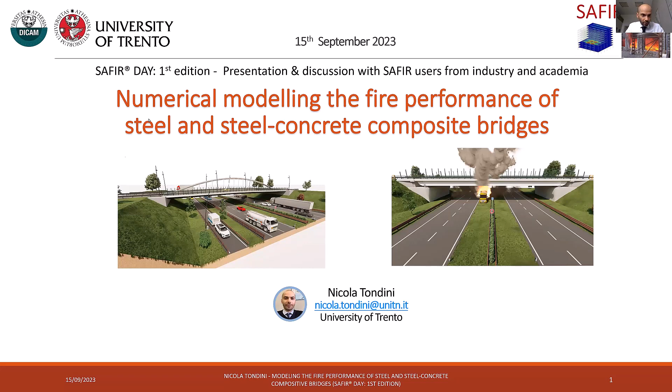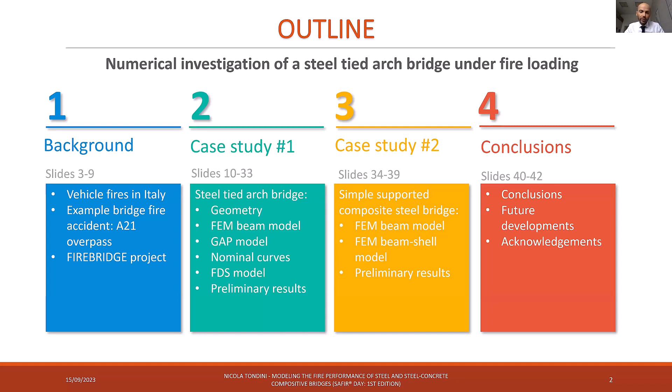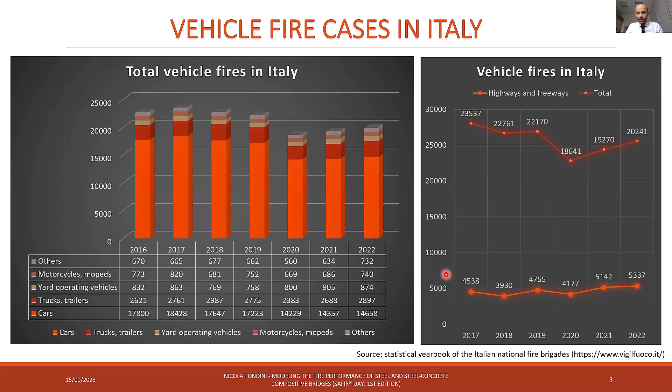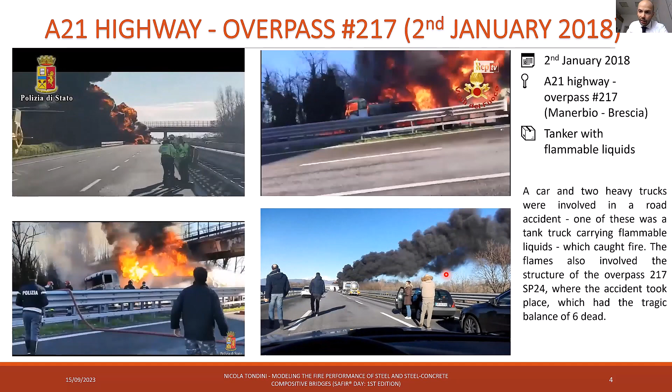Here is an example of this - a fire that occurred in Italy in 2018. There was a road accident underneath a concrete bridge, not very far from Milan. A tanker with flammable liquids ignited, and this is what happened just underneath this overpass on the other motorway.

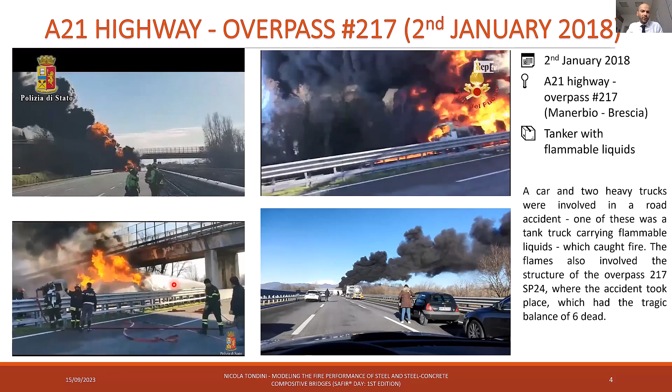So the consequences of this accident were that, after the tests, it was found out that the bridge was not able to withstand the loads anymore, so it was not safe. There was a demolition and also a rebuilding of the bridge. After more than one year, there was a new opening of the overpass.

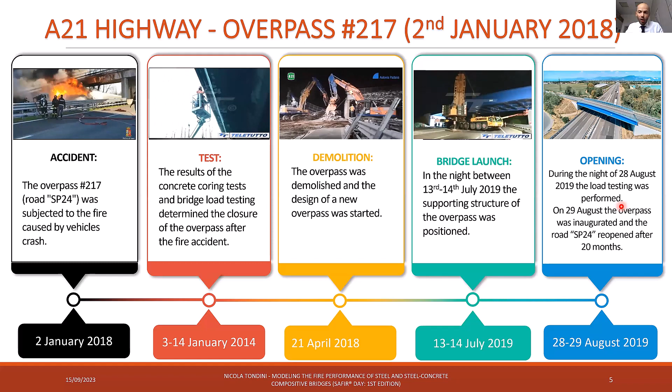So this entailed a lot of consequences. First of all, the temporary closure of the infrastructure, longer travel times for people living nearby, loss of revenues of the highways because of the closed road needed to put that part of the highway into safety, and decrease of business revenues with possible company closures.

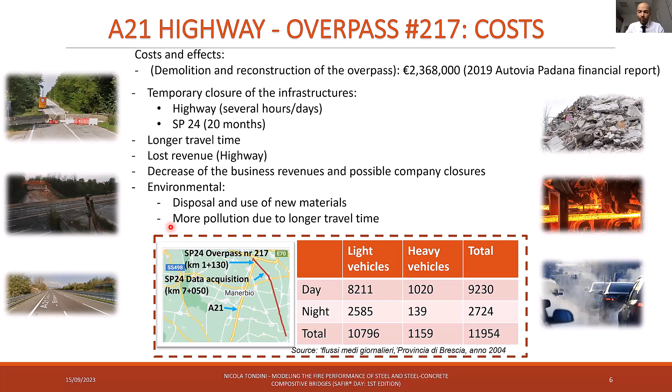We didn't estimate this, but at the environmental level a new bridge had to be rebuilt, and also more pollution occurred due to longer travel times, since there was no shortcut anymore for people commuting to work. This is just one example - there are many examples in the literature. There was also a large fire in the United States at the end of June of this year.

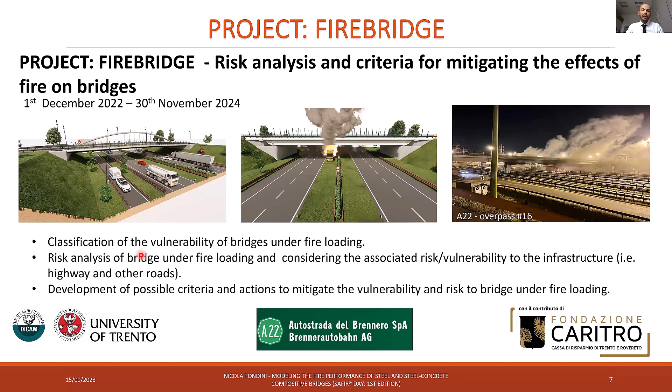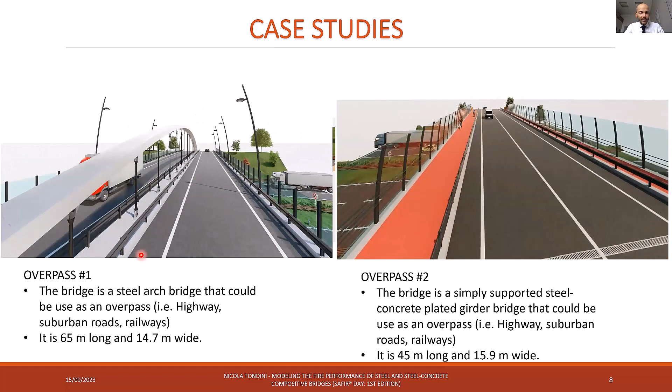So let's go into the modeling of a couple of case studies that can represent overpasses of a highway. The first one on the left is a steel-tied arch bridge, and on the right is a plated girder bridge. The first one is 65 meters long and almost 15 meters wide, whereas the other one is 45 meters long and 16 meters wide.

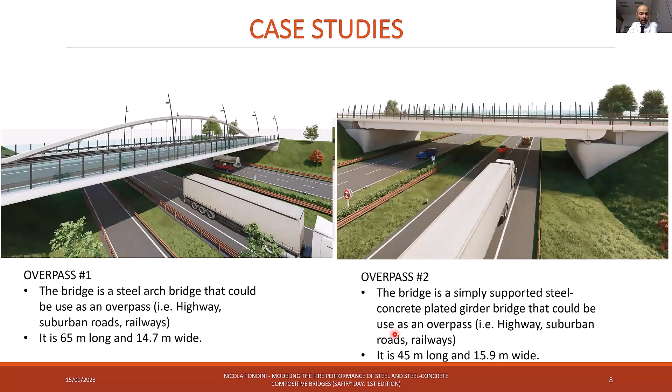Now some characteristics about the cross section. Basically this steel-tied arch bridge has an orthotropic steel deck, so the concrete slab did not participate in the structural section or the stability of the bridge - we consider it only as a weight.

The properties of the steel grade were S355, and the hangers were made of a high strength steel, 750 megapascal. There were two traffic lanes, and the arch is in the middle, as you can see, between the two lanes.

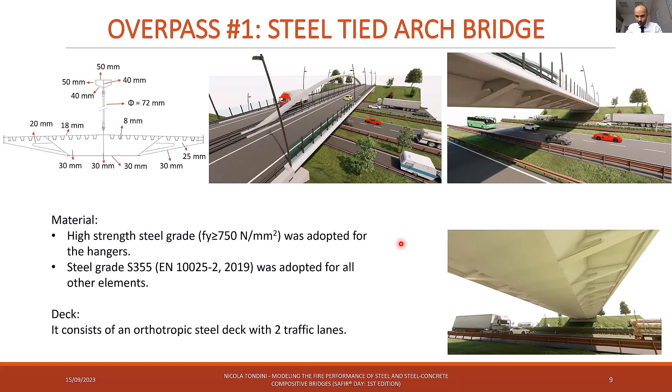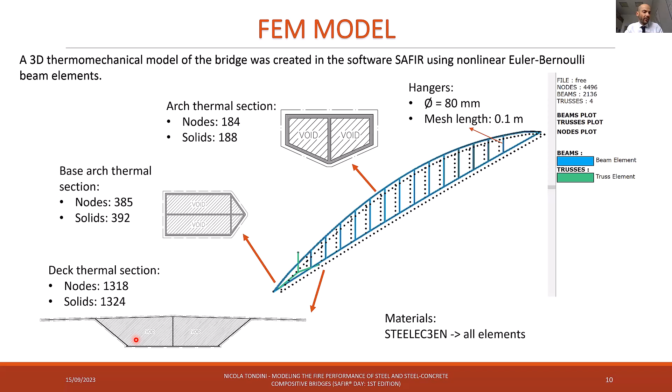Here is the first modeling that we performed in SAFIR - the structural model was by means of beam finite elements, with Euler-Bernoulli beam elements. These are the cross sections, for example of the arch, with the void, and also the orthotropic deck section that was simplified, including some ribs and stiffeners in a simplified way. The cavity is very important in this case, especially if the fire is underneath the bridge.

The load combination we used is self-weight of the structure, permanent loads, and indirect effects due to thermal expansion. The joints accommodate normal seasonal temperature variation over the year, and the expansion joint can also close and create indirect actions. We didn't consider variable loads, assuming that when fire was underneath the bridge, no cars were on the deck.

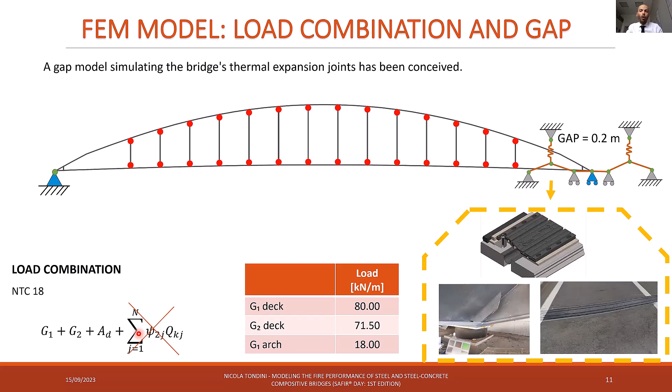Interesting is what we applied to model the effect of the expansion joint. The thermal expansion void was 20 centimeters wide, and we created a particular structure into SAFIR in order to reproduce more realistic boundary conditions, since typically in the literature you find boundary conditions that are simply supported or hinged.

In this case, what we developed, with elements within SAFIR, is a small structure able to reproduce the effect of the expansion joint, and above all, when the expansion of the bridge is such that this thermal expansion joint is closed, it creates some indirect action. There are truss elements with stiffness much higher than the stiffness of the deck, and we put a spring with really small stiffness, mainly for convergence reasons.

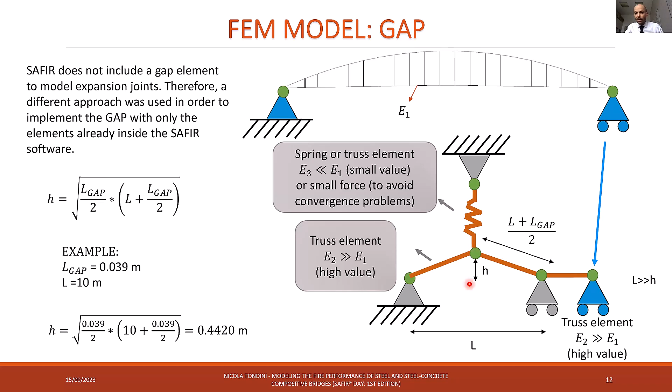This can move, and as soon as these truss elements are on the same line, there is an axial force different from zero. This works in two directions, because if we apply a fire scenario with heating and cooling, the thermal joint can close, but then can also reopen.

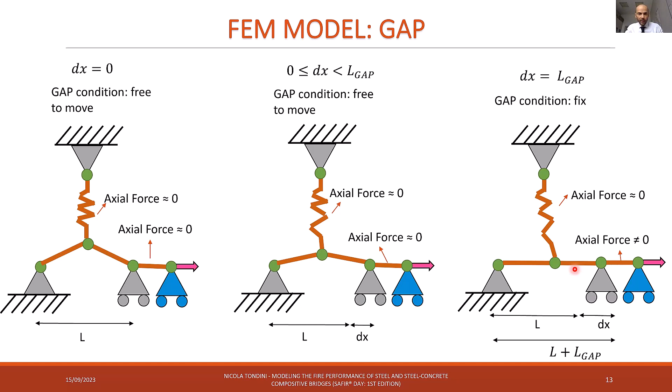Here there is a validation of these gap elements with respect to OpenSees software. You may be familiar with OpenSees, since you can also model multi-hazard analysis between, for example, fire and seismic. Here the comparison is really good.

So here there is the horizontal displacement when this gap is closed. You can see that there is no displacement anymore, but then there is an increase of the forces inside the structure.

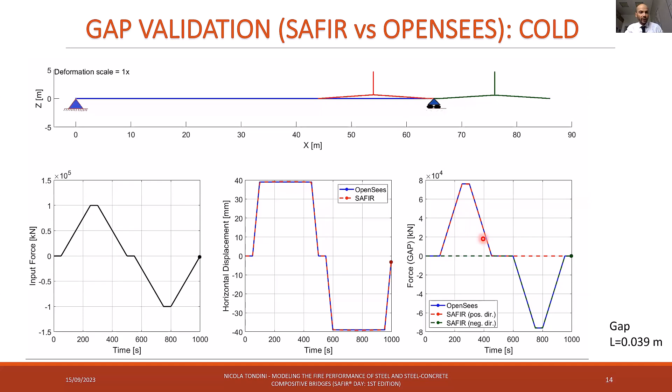The nominal curves that we used in our analysis were different. The two that can be more relevant to this case is the hydrocarbon curve, but also the Stoddard curve, which was derived from an actual accident that happened more than 20 years ago in a railway accident. You can see there is some heating, then a part with a plateau, and then a cooling phase.

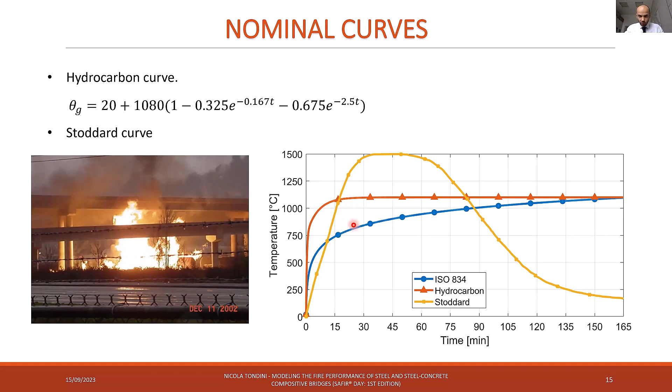You may notice here the comparison with the hydrocarbon curve and the Stoddard curve. There is a lower thermal gradient at the beginning, but then higher temperatures.

Here there are the different fire scenarios when the fire is underneath the bridge, for example when a road accident occurs in the motorway. We considered some full heating, which is unlikely -- the total 65 meters is not very likely to occur.

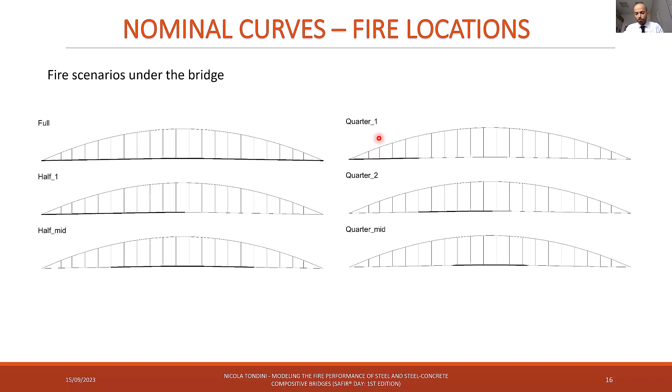It could be more localized, so we considered half of the bridge, also moved from the left middle side to the center, and we also considered quarters in order to be more localized and probably more realistic in terms of the fire scenario.

Here there are some animations. The results are from SAFIR, but we developed routines in MATLAB in order to produce animations and improve the representation of what happened in the structure.

So here you can see the horizontal displacement of the deck. This is under the scenario of the Stoddard curve when it is applied in the middle quarter. You can see that the gap is closed.

If I start the simulation again, you can see that in the tied arch there is tension in the deck, but as soon as there is closure of the thermal expansion joint, you might have compression because of the indirect actions. Here, there was a collapse of the bridge after 40 minutes.

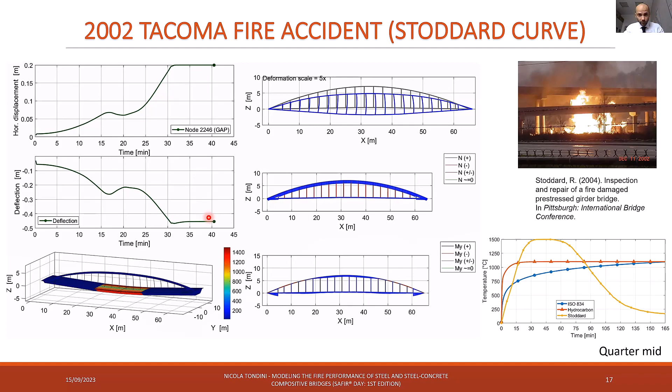Here you can see the evolution of the horizontal displacement for the fire scenarios. Of course, when there is full heating underneath the bridge, the increase of horizontal displacement is higher.

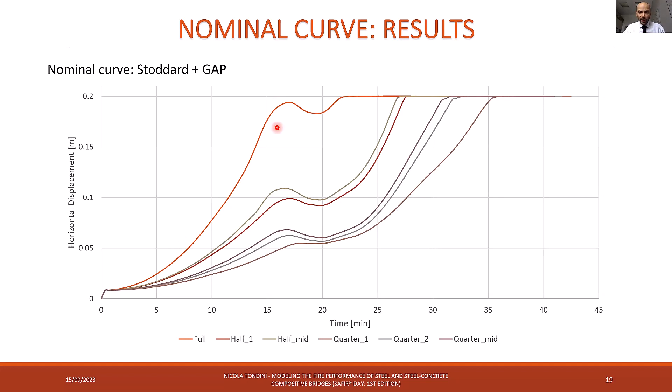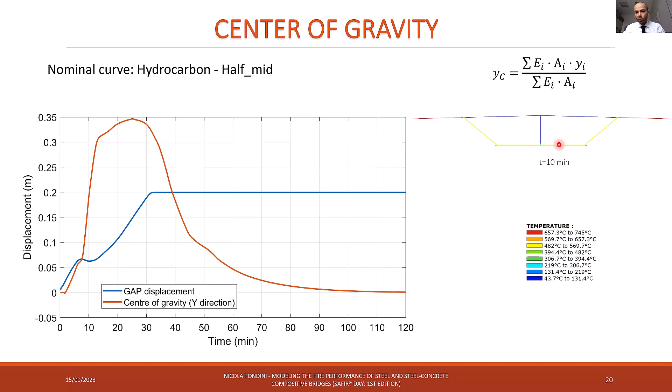Here you can see some waves, because since the heating of the bridge is not uniform, the center of gravity of the bridge moves towards the colder parts, and the resultant of the axial load in the deck is always applied at that point in the node line, so we might have some eccentricities. This is the reason why you have some waves. Here are the representations of the results for the different fire scenarios.

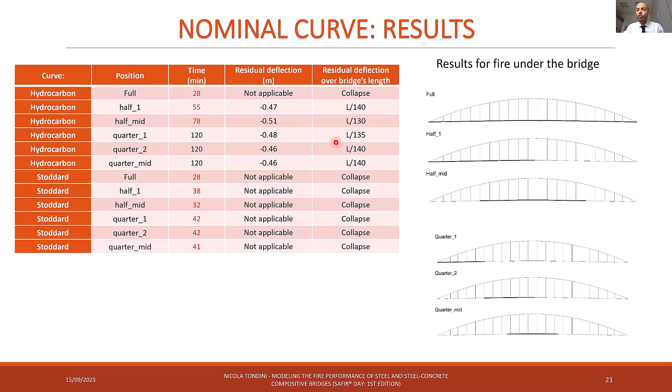Above all, for the Stoddard curve, there was always collapse, whereas by applying the hydrocarbon curve, the collapse didn't occur, and then there was some residual deflection that also has to be quantified in order to judge if the bridge can be functional or not.

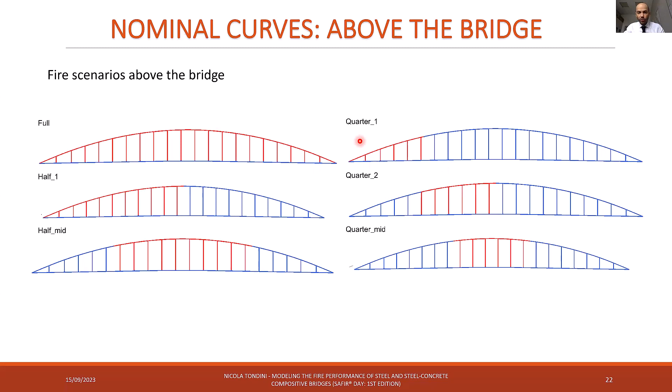Here there are some scenarios above the bridge, because of course the arch is a load-bearing member, and here there are some fire scenarios with the full arch and the hangers that are heated, or just quarters and the position. Here, for example, I think this is the simulation.

Here, the problem, we introduced also some imperfections in the hangers, and the problem was the loss of bearing capacity of the hangers because of their slenderness, that could not support the bridge with the arch.

And so this is the reason why for all the fire scenarios that we simulated with the nominal curves, we found that there was collapse.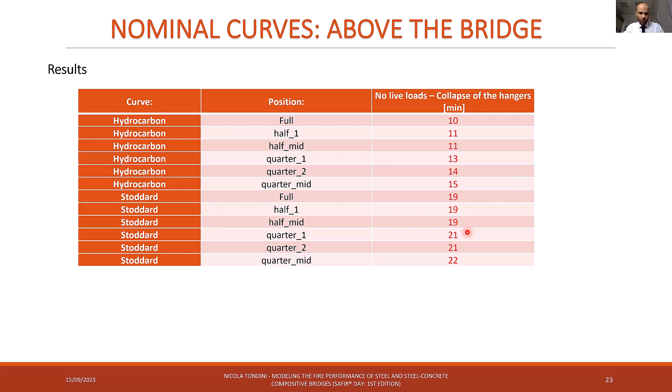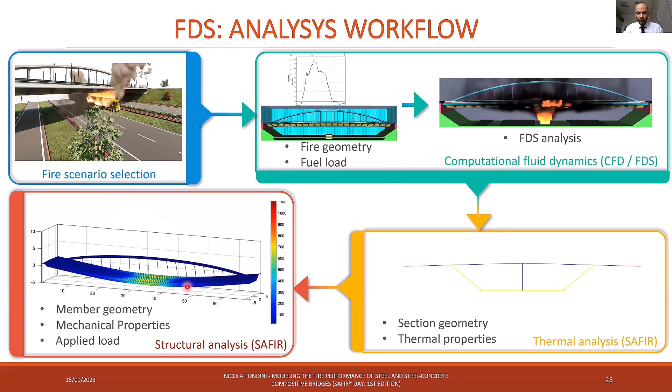Then we applied also some FDS analysis. We used FDS in order to simulate the fire scenario of a tanker that burns underneath the bridge. It was modeled in FDS, and then the thermal analysis and the structural analysis were performed in SAFIR. Here we used heat release rate curves that we found in the literature, in particular in the handbook of fire protection engineering.

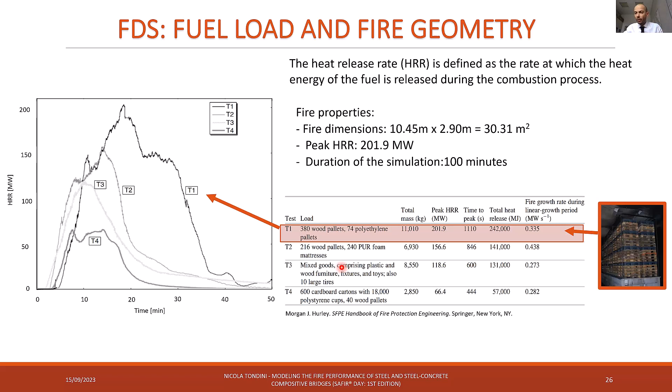Here it is a quite large fire, because the peak of the heat release rate is more than 200 megawatts. You can find this table in the handbook, and then it was used to simulate really large fires in this case.

Here there was the mesh discretization of the computational domain. We performed a mesh sensitivity analysis in order to be time efficient, but also in terms of accuracy. The mesh dimension criteria was based on the characteristic diameter that is based on the heat release rate of the fire.

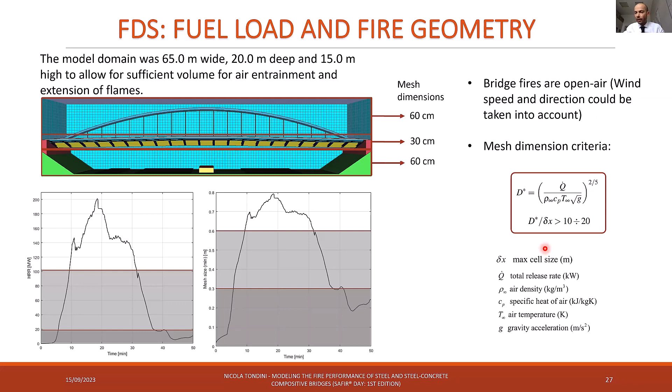Here, the devices that were used were adiabatic surface temperature gas phase devices. There were almost 2,500 on the bridge that were then post-processed and then applied in SAFIR.

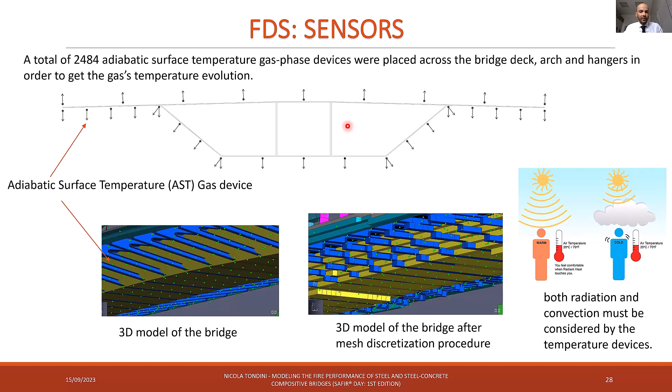Here there is the analysis of this case by using some natural fire curves with FDS. What was observed is that the bridge withstood the whole length of the fire.

So of course there were some localized deformations, and then very hot temperatures in very low localized parts. But the loss of stiffness and strength of that part was not sufficient enough for the bridge to fail, and then there could be some redistribution, also because the arch was basically formed.

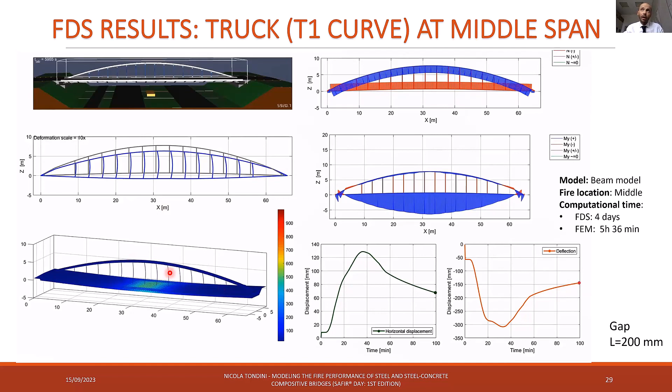Here there are the results of two fire scenarios, the one that I've just shown with the tanker in the middle and then also on the lateral part. And you can see there is the deflection.

That is 15 centimeters. Also in this case, we have to judge if this displacement, that can be also very localized in some parts of the bridge, is high enough to close or to hinder the functionality of the bridge.

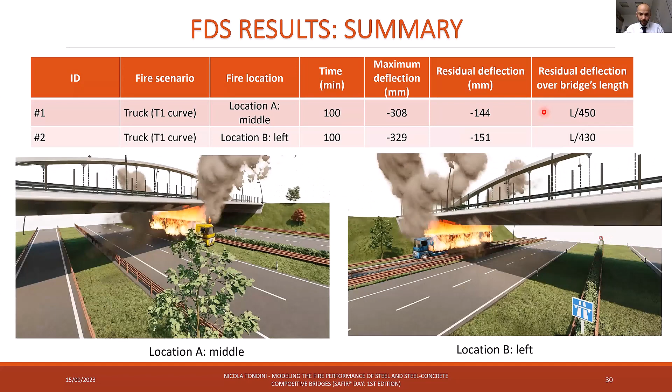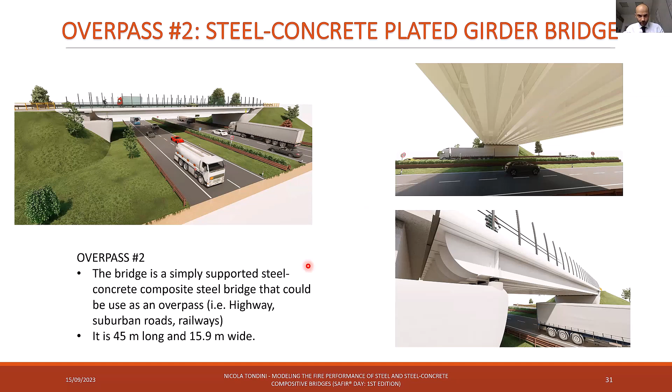Here it is quickly, because these are work in progress on the steel concrete plated girder bridge. Here are some pictures about it.

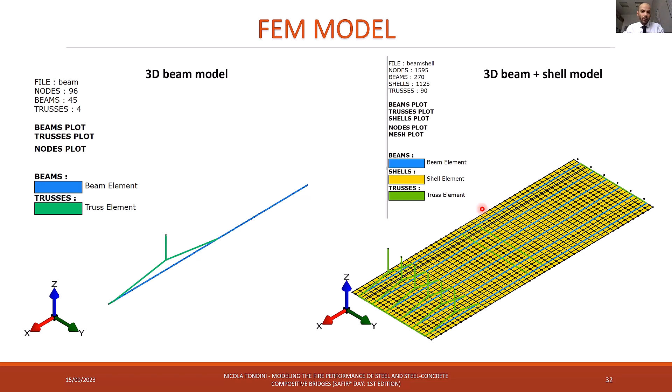Here we started with a 3D beam model, and then we are developing also a 3D beam plus shell model for the concrete slab, and then we are also modeling a totally shell model in order to account for the possible local buckling in the girders.

Here are the materials that we used. We always used for the concrete an explicit creep model.

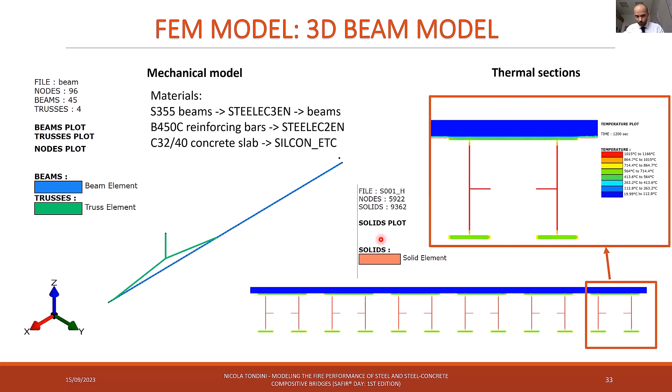And here there is one of the 5 scenarios that we applied, which is just on the lateral part of the bridge.

The modeling of the boundary conditions was the same, so with this, let's say, gap element that was made into SAFIR, here for our example, under the Stoddard curve that was at the left quarter.

After 16 minutes, failure was detected of the bridge, the simply supported bridge. Here it is the shell plus beam model element.

Here there was more refinement because there are also some transfer beams into the deck, so it could better represent also the behavior of the bridge.

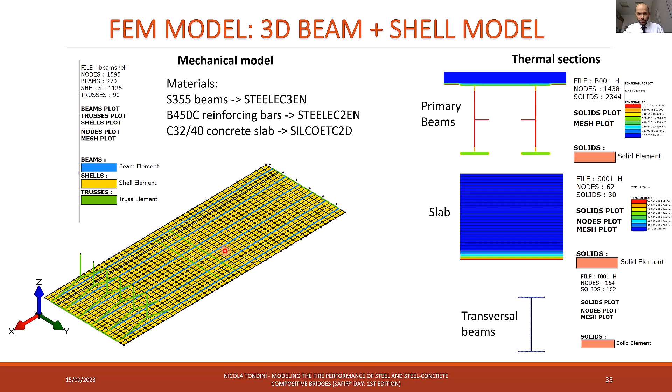And here there are the first analyses. For example, here there is the first comparison of the vertical displacement between the beam model and the beam shell model. In this case, we got really very similar results.

Here I put the computational time, for example, it can also be interesting. It is more than 4 hours for this case, and for the beam-only model it is 32 minutes.

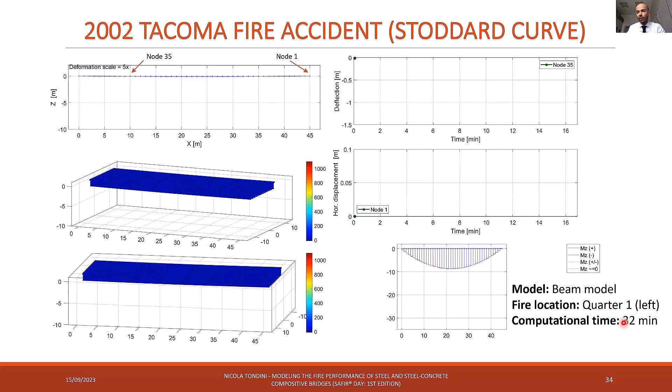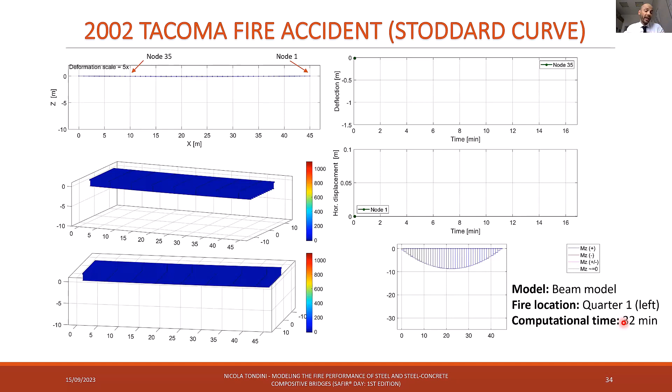So you can see that if at the end of the day we can demonstrate that the results are pretty much the same for the 5 scenarios of interest, we could also judge on the time. For example, the FDS analysis lasted 4 days, which is quite reasonable still for this kind of analysis.

Here there are some conclusions. So fire, as I said at the beginning, is a low probability but high consequence event.

Typically in the codes, there is no provision in terms of fire safety. So typically they are not fire protected, or no measure against fire is taken. Typically, there are fast heating rates, high temperatures within the first few minutes.

So what we did also, comparing some modeling techniques, we included the modeling of the expansion joint with this gap, and then we performed some analysis with nominal curves and natural fire curves by means of CFD modeling.

Here, at the end of the CFD modeling and the thermomechanical analysis, we detected small residual deformations, but they can be very localized. So it is also a matter of discussion how to judge the functionality.

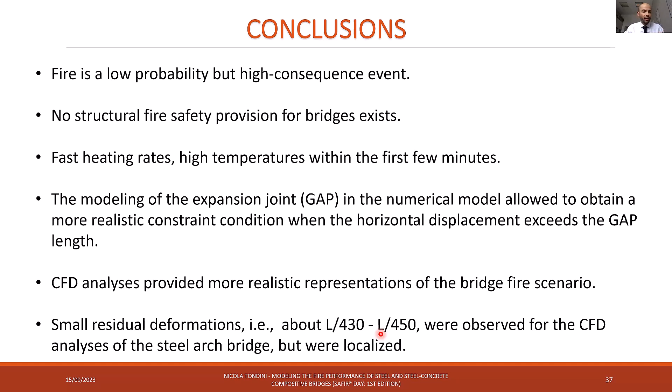Here there are the future perspectives. So here there is the orthotropic deck model with shell elements. The tricky thing in SAFIR is that there is at the moment no cavity allowed for that.

So the post-processing of this is in order to apply consistent thermal analysis. For example, for the beam analysis, it can be really heavy.

And then also, as I said, there was the total shell model for the plated girder bridge. And then we will analyze 5 other scenarios.

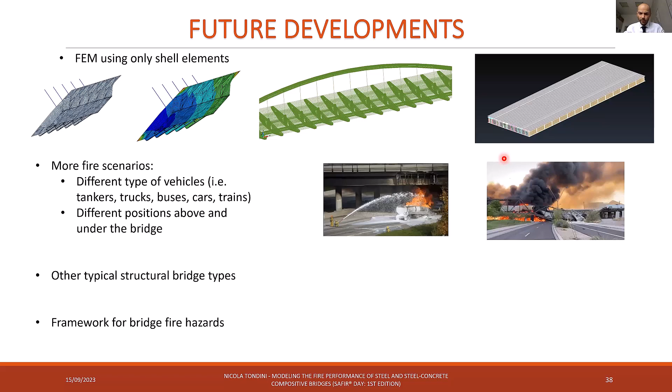I would like to acknowledge my postdoc, Patrick Covi - the animations, all the analyses were made thanks also to his support, and also some master students who participated in this research project, and big supporters as well. So thank you very much, and then I'm available for questions.

Thank you very much, Nicola. Really excellent presentation and very impressive range of studies and range of applications with SAFIR. Very nice to see that. There were a few questions, and congratulations in the comments, notably considering you showed several tools that are really nice.

So maybe the first question I want to ask you about the FDS SAFIR interfacing. You mentioned a large number of AST sensors, so I assume you did not use the so-called interface for that case. Yes, exactly, we didn't use it. As you know, I was part of the development at the beginning of this interface.

At this stage, that interface was mainly conceived for when the structure is not included into the CFD modeling, so the structure does not influence the fluid dynamics a lot. In this case, to start with, we wanted to include the bridge inside the analysis, and then we wanted, based also on your work and comparisons that you did in recent years, to check what is the difference between applying the SAFIR-FDS interface that is included into SAFIR and FDS, versus the strategy that we used in this modeling.